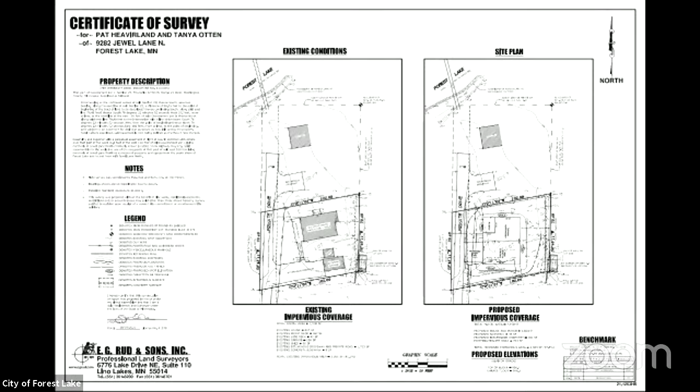In total, this site has 7,950 square feet. That is just about half of the minimum lot size for this area, which is 15,000. Currently there are 3,266 square feet of impervious surface on this site, that's the existing impervious surface. The proposed impervious area would be 2,983.

So there is a breakdown in the staff report, and I'm happy to take a moment to answer any questions on the review.

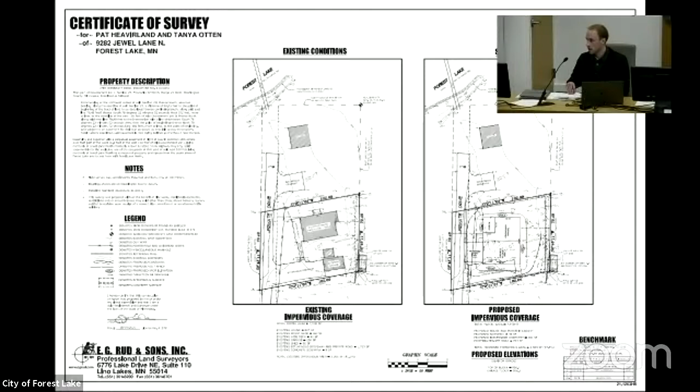Questions for Nathan? Eddie?

So the 12.5%, is that the number that includes this additional drive, or where did that number come from? Let me back up. In the shoreland overlay district, you're normally allowed only 25% of your property to be impervious. But there's a specific provision that allows sites that are smaller. The 12.5 number came from looking at it for 25%, when in reality it should be looked at for 30%.

Geneva? When I was reading on this, it looked like there was something where you were excluding part of the driveway from the percentages because somebody else has to use it to get there. Yeah, that's a good question.

I'm going to zoom in here so you can see. On the screen is showing the proposed conditions. You can see on the westerly lot line running from north to south is a private drive. This private drive serves the property to the north of this subject property with access. So if you were to exclude the portion of the private drive that serves the other property from your consideration, that would remove 332 square feet.

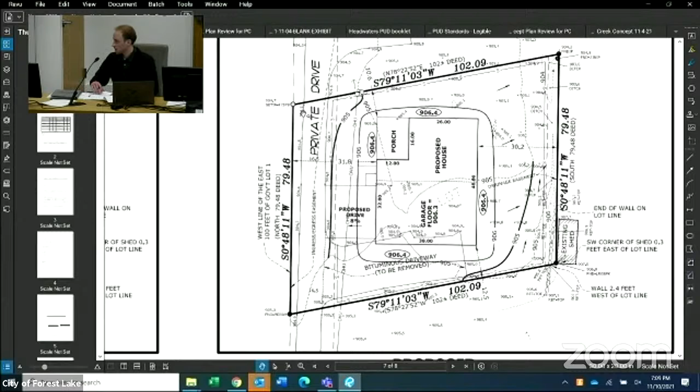Who owns the private drive? In other words, the property that the private drive is on, is that owned by the applicant and they are granting an easement? That is typically, yeah, there's an easement over that area. Since they own that, I would expect that that would be included in the amount of impervious surface. Yep, that's how we look at it. It was just provided to you as a consideration perhaps, or something you might want to know.

But because we're looking at a variance here, I just want to understand what you figured in that 332 square feet. I'm assuming it's the piece of the drive that is beyond the proposed connection into the new garage there, is that correct? Exactly correct, yes, that's just that chunk, an estimate, less than half of the length of that drive. If you're following the cursor here on the screen, you can see this area and up to the top here.

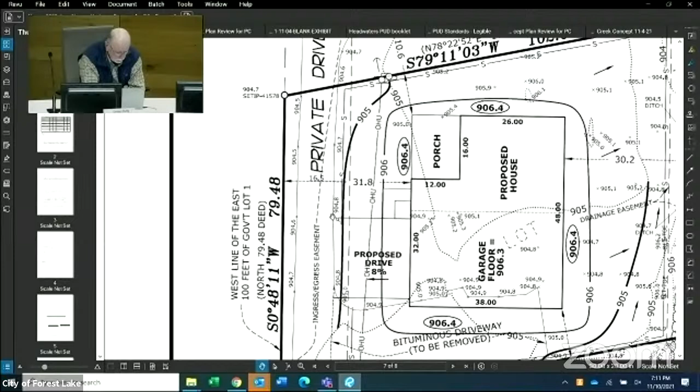So I can move on and briefly discuss the findings here. The applicant has identified the shape and size of the parcel as constituting a practical difficulty to building a new, more modern, single-family home. The applicant is proposing to demolish the existing structures on site and build a use that's in line with the zoning for this area. Running through the findings, on criterion C, this lot predates current zoning restrictions, specifically minimum lot size.

It does not appear that, for criterion D, this proposed plan would adversely impact the surrounding community. And lastly, to address criterion E, the request appears to meet the intent of the zoning ordinance to continue to permit single-family homes in this area.

We reached out to both the city engineer and the public works director, who supplied comments that are in the staff report, and they're also in the proposed conditions of approval, if the planning commission chooses to adopt them. The Minnesota DNR was provided this application for comment but did not respond. The Comfort Lake Forest Lake Watershed District also provided comments, noting that redevelopment of the site would require permitting, and they encourage the reduction of impervious area.

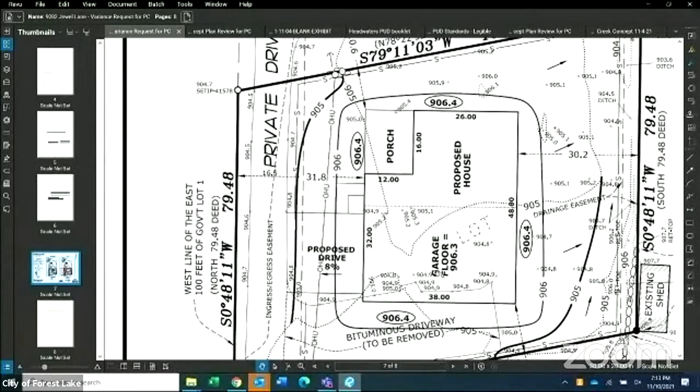I do have building plans, I believe they were supplied to us. I have a paper copy with me too, if you want to see it. You'll have to give me a moment to bring those up — I'm going to unplug here for a second.

As you said, they're going to remove the entire structure that's there now and rebuild completely. Yes, that's correct. They're going to remove all the structures currently on site and construct a new single-family home with an attached garage.

And I'm not seeing the home plans in my files. Does the applicant know — is it one level, is it two levels? I'd advise having the applicant let you know about that; we can wait. Other questions? Well, that was mine.

Thank you. Would the applicant like to come up, say anything, and make any comments you have about your application?

Pat, this is my wife Tanya. I'm sorry, I asked you to come up to the podium here, please — to the podium, sorry, hard to hear you. We're gonna — yeah, so am I. State your name and address for the public record, please. My name is Pat Heavirland, and we live at 3090 Cleveland Avenue, North Roseville, temporarily.

Karen, is the overhead working? The overhead projector? I don't think so. How come, does it come down? I don't have any knowledge of the overhead. No knowledge of that. Oh, here comes the expert — there should be a camera up there that projects it onto the screen. I'm learning something new every day. Kind of limiting here. I didn't know they moved it. I think, Karen, you just pushed number 4 also. Who, me? Really? But I'll have it for the video for the people watching. No, it's this one — it's podium, it's gotta go down there. I don't see anything on the screen. I suppose we could have — is it on? You walk up there and show us.

I could have my wife come up and hold it up for you while I explain. It's showing up live on YouTube, but I don't see it on any other screens. Can you guys see it on your screens? We don't have anything on our screen at all right now. Yeah, I don't know. Well, let's just move forward.

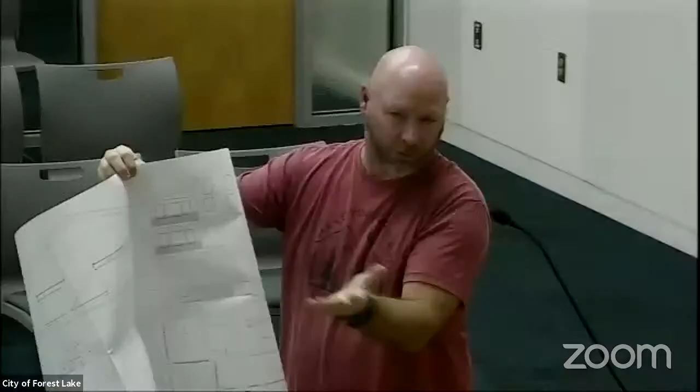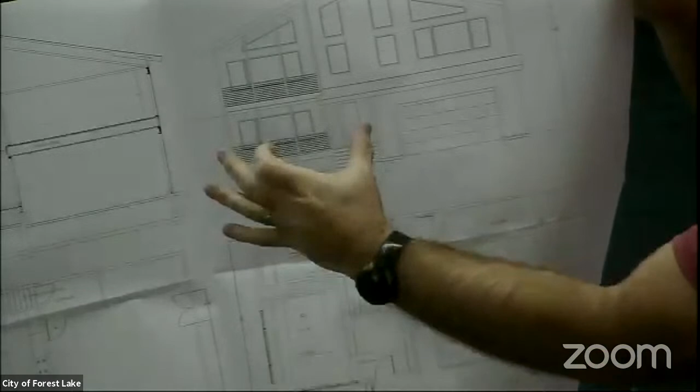So it'll have a tuck-under garage on the south side, and the house is 24 by 26. The garage is 24 by 38, and then we have a 12-foot porch. So the whole building is basically 38 by 48, and it's a 2-story, so that's where you get your 1,824 square feet. The footprint, including the garage, is 1,824. I kept the roof line to a 4-12 pitch to minimize the height for the people to our south.

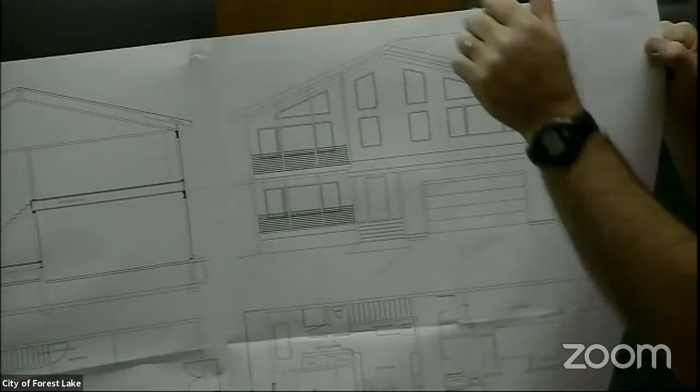I'm trying to be as good a neighbor as I can by building a new house in their view. We've met them, they're really nice people, and we also share the private drive and the dock access with them. But yeah, it's a pretty basic, pretty modest house for around Forest Lake.

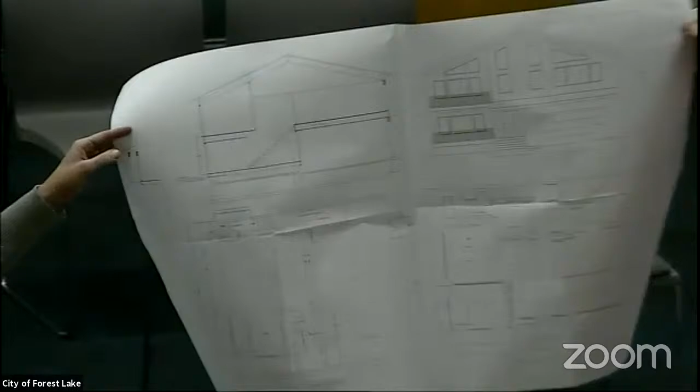Susan: I don't see any patio or deck. Applicant: You're right, I see where you have the porch. That's just the porch. Commissioner: It's constructed as a deck. Applicant: I'm calling it a porch because I'm going to screen it in.

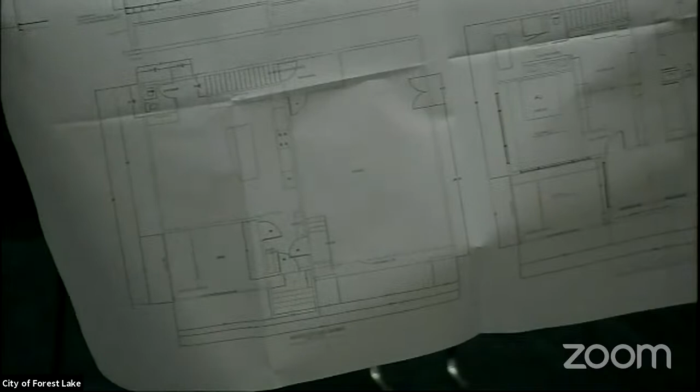So it's crawl space construction? Correct, it'll have a 2-foot crawl space. It looks like you're up a couple feet out of the ground. Yep, right here the house floor will be roughly 2 to 3 feet above the slab as a crawl space, which will be just slightly above grade.

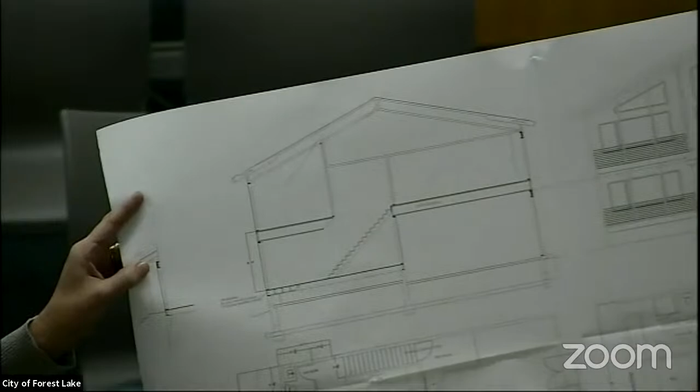You realize that with the variance, if it's granted, you'd already be above the permitted impervious surface, so you couldn't put a concrete pad out for a grill, or an additional deck, no new sidewalks, et cetera. Exactly, I understand, we're trying to fit within the setbacks.

Because the current property isn't within the setbacks at all. And we're tearing out, he didn't mention it, but we're tearing out the current asphalt driveway, which runs right up to the neighbor's property line.

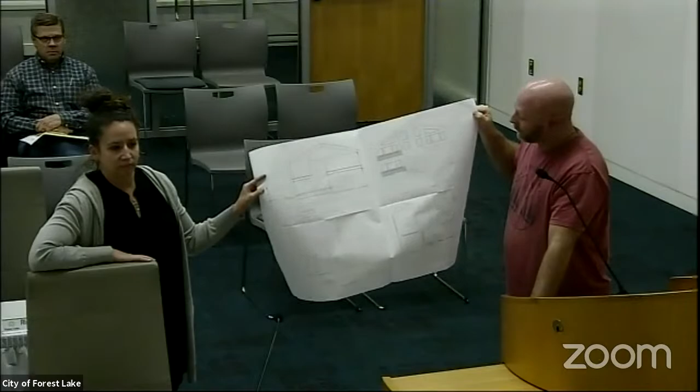There's a retaining wall along that east property line, so that's down and you're up. No, he's down, I'm down, neighbors are up behind him.

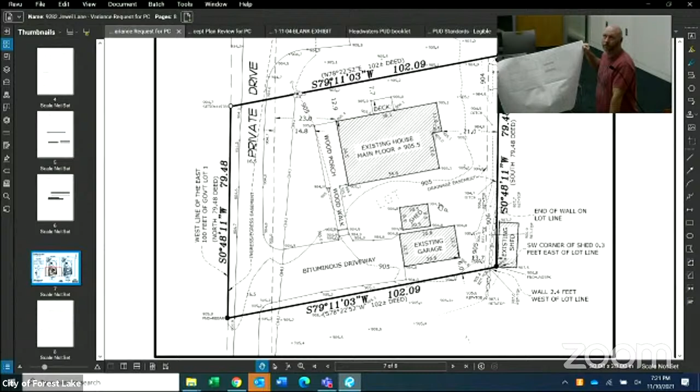Other questions of the applicant? Did you say the garage was 24 wide and 38 deep, or 38 wide and 24 deep? It's 24 wide and 38 deep.

You say there's a cemented crawl space underneath your porch? Not under the porch, under the house. The porch, call it a deck - the only reason I'm calling it a porch is because we're going to put a roof over it and screen it in. So it's going to be wood framed?

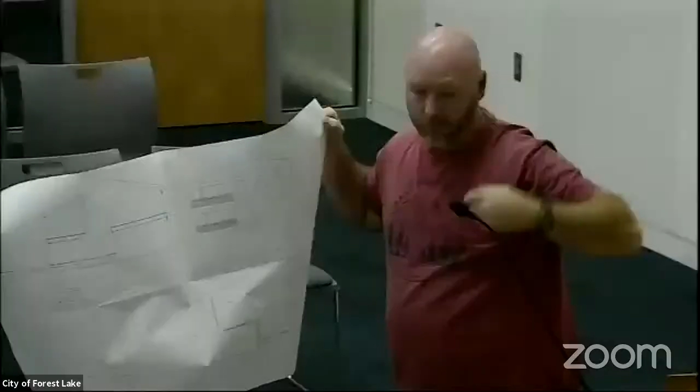Wood framed, probably cedar decking. Not concrete poured? No, no, it'll probably have rock underneath it. I know that counts against us for impervious surface, but it's really not impervious - it's a deck with rock under it. Yeah, but water hitting the roof of the deck doesn't go down into the dirt, so it is impervious by definition.

No, decks are considered pervious. Well, this one's got a roof over it - the roof is what makes it impervious. Right, that's what it says, it's got the roof, so what falls on the roof doesn't go into the ground. Correct. Other questions of the applicant?

We won't make you hold that up anymore. That's fine, if you guys want to see it I can leave it for you. You could leave it for the public record, and Nathan will have a copy of it. It's preliminary, but it's pretty set in stone - I'm the draftsman, so I know it's not changing much.

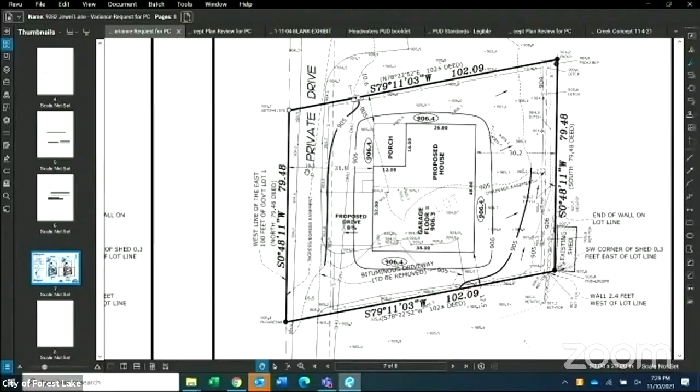Talking about 7.5%. Square footage wise, are we looking at, is that a couple hundred square feet? We're looking at 625. And if the driveway, if we kind of considered that driveway as... well, if you took the 300 off, 300 off, we're looking at about 300, so it's about half over. And I'm willing to grant that extra drive as something that I'm at least not factoring in my own mind into what's happening here. And I realize that if you change the size of that garage, you have to change it.

They are improving the setbacks. I will, yes, I will grant that. We've just had this absolute endless litany of shoreland property variances on setback till we're ad nauseam. Other comments, concerns?

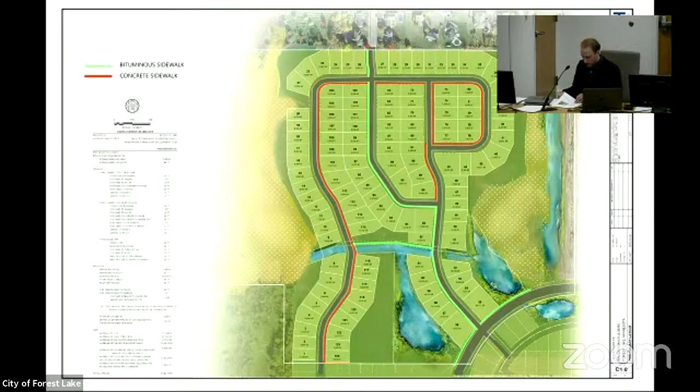The applicant for this concept plan review is John Dobbs, working on behalf of Paul Bruggeman, the owner for this property, you may know, Chris Taylor. This property is located in the Headwaters Master PUD area, to the west of what has currently been developed in the Headwaters area. The future land use designation for this property is low to medium density residential. The base zoning district in this area is MXR1, which we're very familiar with, the residential single family and townhouse district.

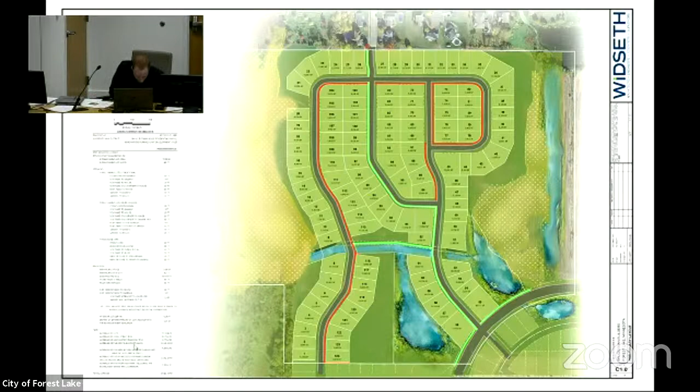As some background for the commission on this application, this parcel is part of the Headwaters Master PUD, which was approved by the city in 2006 initially. This particular property is roughly 60 acres, actually 69 acres roughly. The proposal in front of the Planning Commission on this concept plan has 125 single-family lots proposed for the property. The land use proposed for this development is exclusively single-family homes, which does appear to be consistent with the vision established by the Headwaters Master PUD for this area.

So I'm going to really quickly jump over to the Headwaters PUD so we're all on the same page. This is the cover page for a really big packet of information, but I'm going to go to the master plan here. You want an original? I found one this weekend. You have one, okay. That's hard to find. So this is the master plan for this area.

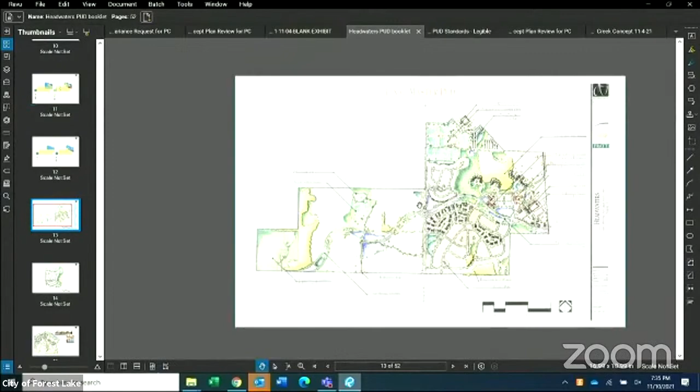If you're looking at the screen and the cursor, you can see the location roughly of this parcel. This area from the very get-go was guided for single-family land use. This is part of phase 2 for this PUD area. As the Headwaters Master PUD was established before 2008, conditions changed almost immediately after this was approved initially, so the phases established, part of phase 1 and phases 2 and 3, were put off by the developer at the time. That's a little bit of the history. So I'm going to go back to the plan here.

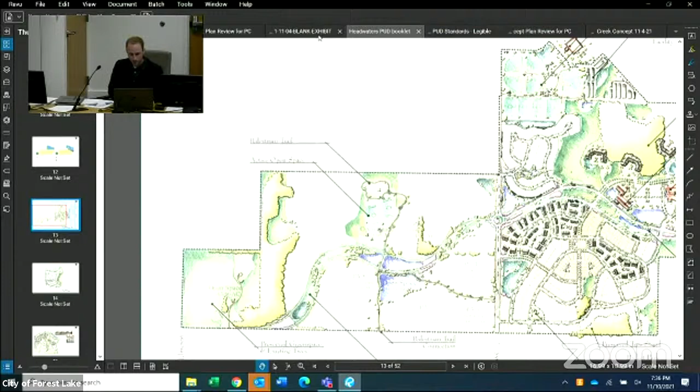So the Headwaters Master PUD established standards for single-family homes for this area. The standards are in the staff report that you've had the chance to review.

The minimum lot area for a traditional single-family lot is 7,000 square feet, with a minimum lot width of 65 feet and a front yard setback of 25 feet, a side yard setback on a corner property of 20 feet, a rear yard setback of 25 feet, and setbacks for the side yard that differ depending on which side of the house you're on. If you're on the house side, the setback is 10 feet, and if you're on the garage side, it's 5 feet. Those average out to about 7.5 feet typically.

The proposal by the developer roughly mirrors the standards established for this area. The developer, in this plan submitted to staff after we published the report, shows a minimum lot size of 7,000 square feet, consistent with the PUD, and a minimum lot width of 65 feet, also consistent. Front yard setback of 25 feet, side yard setback on corner lots of 20 feet, a rear yard setback of 30 feet, which actually mirrors the MXR1 district standard, and then the same side yard setbacks established in the Headwaters PUD. So it meets all of those standards for a traditional single-family lot.

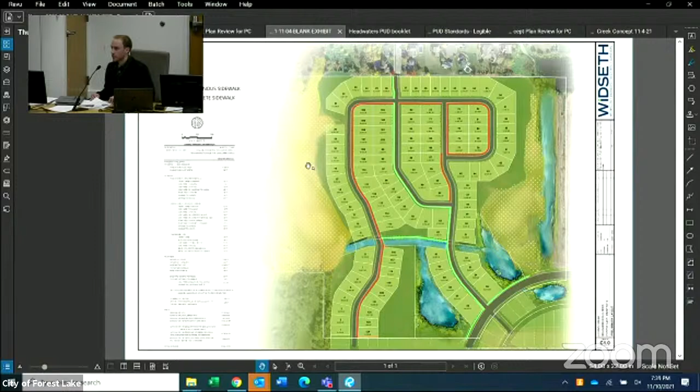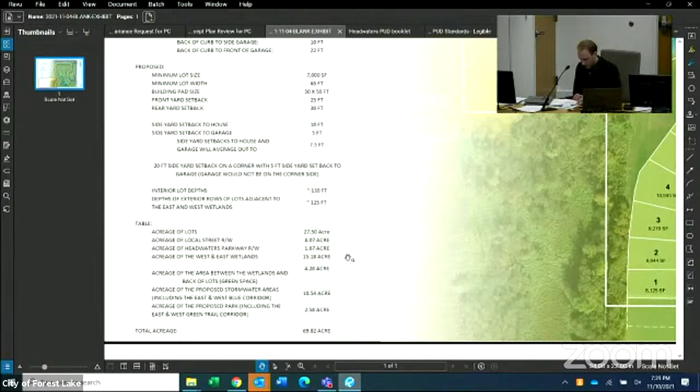The density proposed for this development on gross acreage is 2.08 units per acre. If you subtract, in the plan the developer provided, the calculation for the amount of wetland acreage, which is estimated at 15.18 acres, from the overall area, you get a density of 2.27 units per acre.

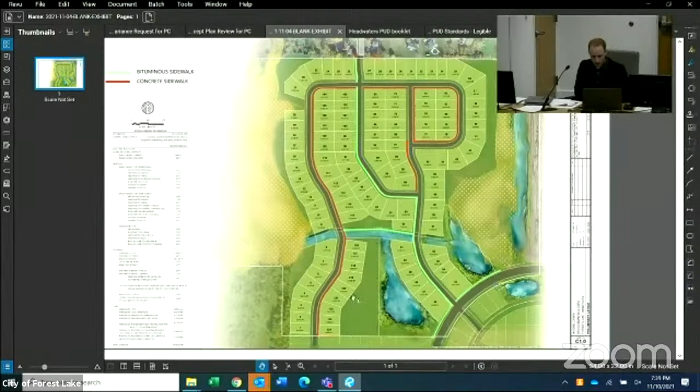So, parkland dedication. Here you can see in this development a green area—I'm circling it with the cursor right now. That is approximately 3 acres in size and situated near a 4-acre stormwater area, which is to the east on this concept plan.

The developer is proposing trails. You can see on the screen a concrete sidewalk proposed here in red, which would run along at least one side of every street, and a bituminous sidewalk shown in green here. This system of sidewalks would provide connectivity from Headwaters Parkway up to the trail system north of this development.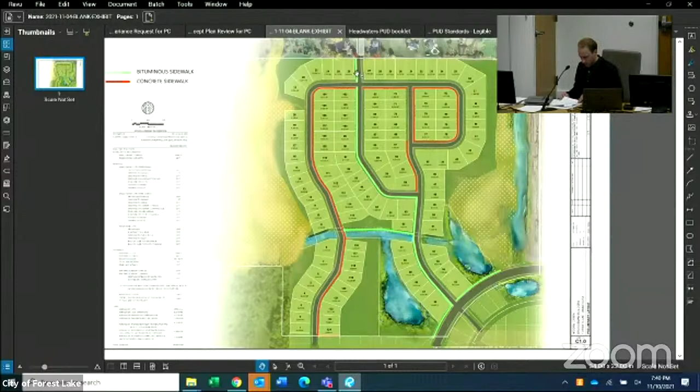In summary, this does appear to be in line with the intent of the comprehensive plan for this area. The city engineer was approached for comment and provided a memo attached to your report. Staging of this development, I'll defer to the developer—John Dobbs is here this evening, and I'm sure would like to present his proposal to you. Staff recommend that you consider this concept plan and its conformity with the city's requirements and provide feedback to the developer. So with that, I'll hand it back to the chair and take any questions.

Any questions of Nathan? Mike?

Nathan, could you run the setbacks by again, the side setbacks? Yes, absolutely. The side yard setbacks for this Headwaters Master PUD are 10 feet from the side yard to the portion of a building that's the house, and 5 feet from the portion that's considered garage. Since we can't see it here, is it house on one side, garage on the other, then the next house would be garage and house, garage? I believe that's the idea—because that's only 15 feet then from house to house, or structure to structure, correct? Yeah, at a minimum it would have to be at least 15. Okay, all right, thanks.

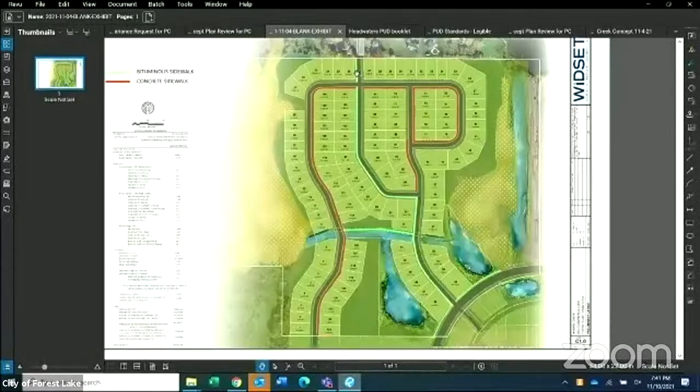Well, to clarify that, as long as we're on this point—right on this page you have up, it shows garage to garage being 10 feet. Down in the setbacks? Can you scroll up, please? Looking at it—it says right here, go up a couple more lines—garage to garage, 10 feet. So we know that the fire department is not going to allow anything less than 15 feet between structures. So the garage to garage minimum needs to be 15, not 10.

I know that Chief Newman, that's his floor, would prefer to see 10 feet or 20 feet total. But I want to make sure, I don't know if the developer's here or if you're the developer for the next site, that there's got to be 15 feet between structures.

Other questions of Nathan? They didn't provide any information on building pad sizes. Is there any indication of what they're looking for here? Yeah, so building pad sizes are proposed on this plan to be 50 feet by 50 feet, so that's 2,500 square feet. If you took 5 feet off of that, that would be...

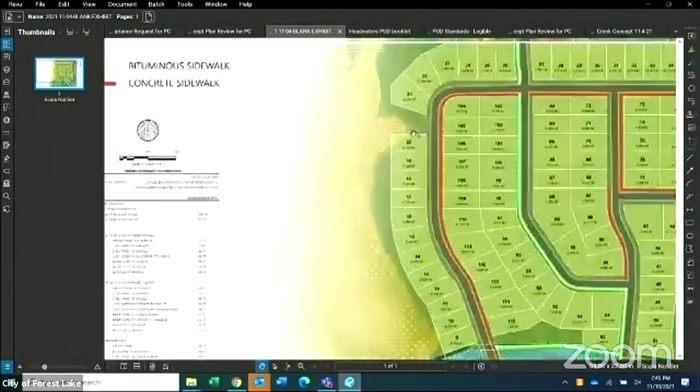Hearing none, is the developer—oh, Susan, I'm sorry. Nathan, have they told you what is happening between lots 20 and 21? I believe that's part of a wetland area, you can see it on the screen here zoomed in. I would defer to the developer on the decision for that area.

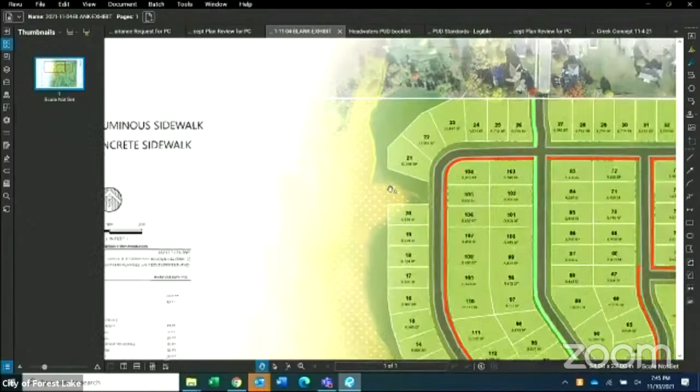My last question for you, Nathan: if you go down to where the park starts, where the river walk is, I see that little sidewalk that goes in—talking about this thing here? Is that proposed to be part of the parkland, or is that an easement over a property? I think this area here is proposed to be part of the park area. Anything that's the lighter green color would be part of one of the lots. I couldn't get it clear enough on my computer at home to tell.

All righty, thank you. So it would be part of... they would walk on the park. It's the next one that's an easement. But in practical reality, we know that's just not going to happen. Lot 116 is gonna go all the way up to, I guess it's like a rolling river that they've got there in blue.

Well, I'm thinking more like... as far as I understand, just to clarify what this blue color is—and I'd have the developer give you more information—this would be a swale to allow for water to drain into the wetland complex to the west. So it's not a river walk.

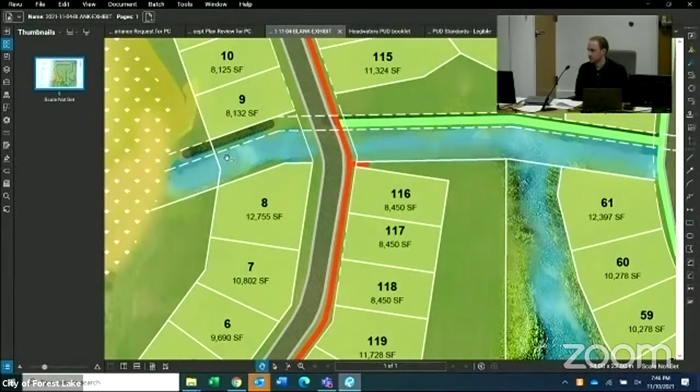When it's raining, it might be—well, heavy rain. And basically what humans do is lot 116 is gonna go and mow and assume that their property goes up to the edge of the swale. I'm not sure, in terms of somebody taking... I have questions when the developer comes. I would be stunned if you didn't.

Other questions of Nathan? And the developer is present. We ask you come up and please state your name and address for the record. Maybe spend a couple minutes giving an overall concept, how you think this is going to fly, and then I assume we will have plenty of comments and conversation with you.

Good evening, my name is John Dobbs, and I'm project manager for the Hidden Creek Project. I work for Paul Bergman in the back. Yeah, I'd be happy to do that, commissioners, and I'll try to answer—I think I got most of the questions here. So we have been working on this project for about a year and a half now, and it's an interesting piece of land. It kind of ends where the last phase of the PUD—I actually have a copy of it as well in my office—and it kind of harkens back to my landscape architecture days at the University of Minnesota.

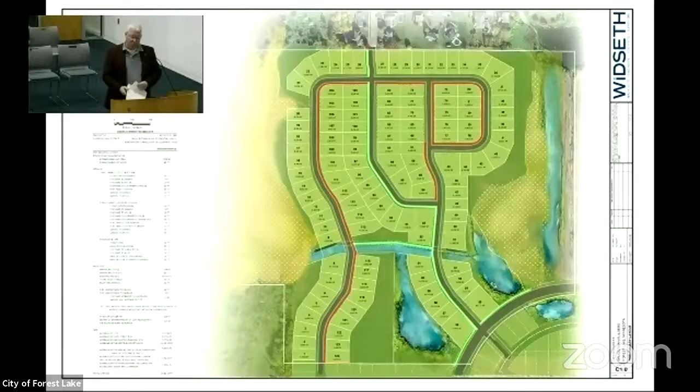It does impinge on lot 20 - that wetland delineation with the speckled area impinges on lot 20 a little bit. So we're working through the final details in the preliminary plat of a grading plan, and the horizontal and vertical road profiles. We have to connect to the north, and we have to get back down to the low spot, which is actually the blue area between the east and west wetlands. We haven't worked all the grading plan out yet.

So obviously when we do that, we'll have to come up with the minimum square footage and the setbacks and all the other things that go with it. Did I answer your question about lots 20 and 21? It will affect the buildability of lot 20, depending on where the line is. Yeah, that's correct. So we're going to work through that.

Come with a variance on that, maybe. I have a sense that you have a good memory for things like this. I do too. So we'll cross that bridge when I actually get a preliminary plat.

It is all single family. There are no townhouses, and they have traditional garages on the front.

The trail - you guys were just discussing the east-west connection, the trail on the north side. It is a concept. From my point of view, there's a number of things to work out. It looks very geometric, and water and parkland very rarely look geometric. So I began to do some rough sketches. I was actually in front of the Park Commission about 4 months ago, maybe a little longer. We had a pretty good dialogue about what the Parks Commission was looking for. They talked about some of the problems they were experiencing historically in the park.

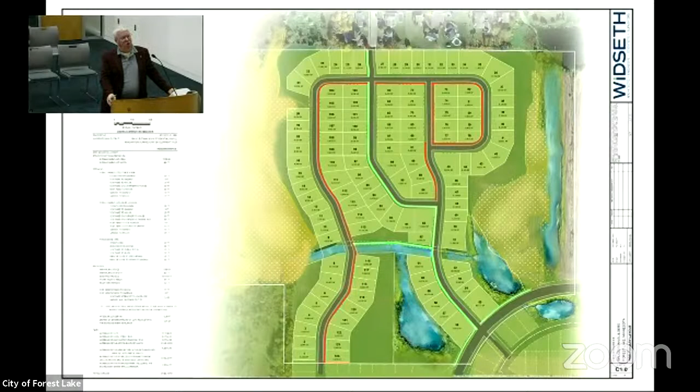So there's a bounce factor where the water could top over, and that's why there aren't any lots there. It'd be a low spot in the street, allowing the water to overflow to the west side, and that wetland on the west is huge - that's actually where the drainage pattern really goes. So it's not park, it would be open space. Yeah, it's part of the stormwater bounce system. But that being said, it's open space, so it would be good to have it at least somewhat programmed, so it could be used on some level, whether it technically would be park or not - probably not, it would be stormwater.

Susan? Okay, I'm looking at the green - are you intending that the horizontal green is the entrance to the park, for all those folks to the north?

And if so, then you're going to need some sort of a bridge, because otherwise you've got a swale there—you go down the swale, up the swale—and there's no real way of getting into that park area with a stroller, a bike, or a big wheel. I don't see how anybody's entering that.

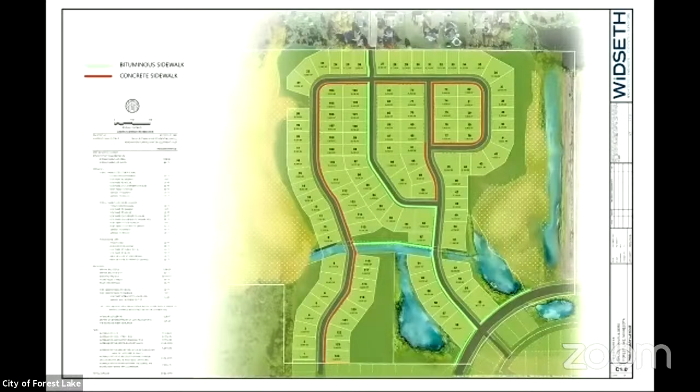I also don't see how that little sliver backing on 116, 93, 92, and 62 would get accessed, assuming the city has to maintain it, cut the grass, etc. Then where you're backing up to 116, 118 through 125, from a public works standpoint, that's a bear to maintain.

And again, I'll also say that 117 is not going to believe they don't own all the way up to the edge of the ditch, unless somebody's fencing it. We're dealing with humans.

What is the thought on the east side, 36 through 48? Is that to be maintained land, or will the backyards of those properties fade into the wetland? On the east side—36, 37, 38, 39, the northeast corner, 43 to 48—there's a curve that comes through.

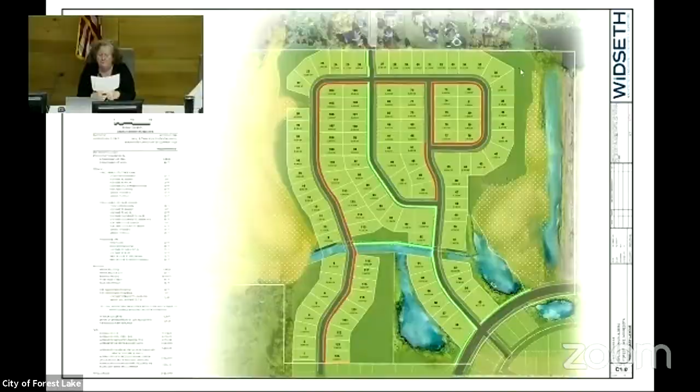Well, there's a wetland buffer that Rice Creek Watershed has, and then it would just be open space adjacent to the wetland, shown as the dotted graphic, which is the delineated wetland.

My concern is that folks are going to say, 'Well, I live in 37 and I really want my big garden,' and put the play structure in that area because it looks like it's theirs, but it's really supposed to be wetland buffer.

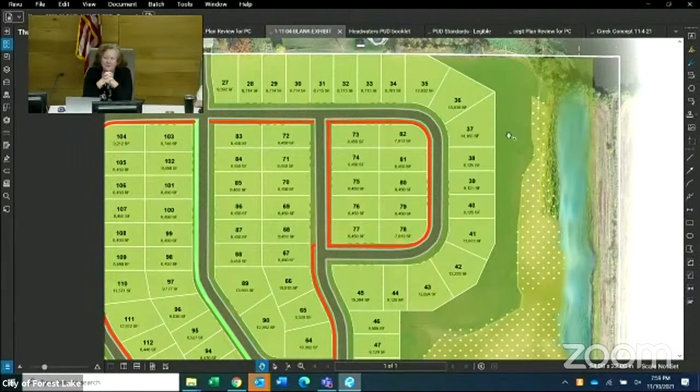Yes, this is a challenge, and y'all have done great—it's a challenging property—but I see future challenges in terms of what's public, what's not, what's buildable, what's not. Y'all are going to leave, and then the city's going to have to figure out how to deal with encroachments, maintaining the wetlands so they function as wetlands. I'm not sure how we get in there, to be honest.

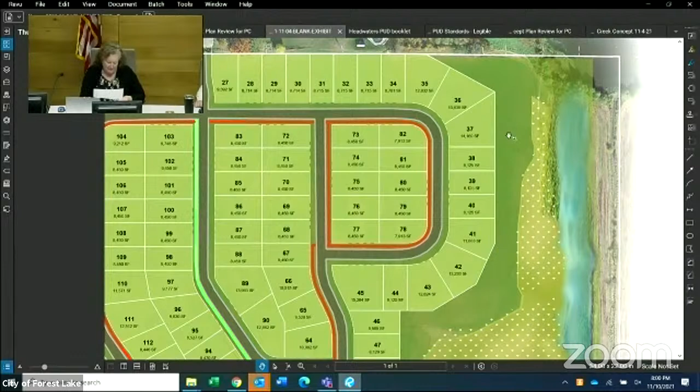In terms of delineation, I just went through this on a small project in Blaine. There's a perpetual easement given to Rice Creek Watershed, and you have to sign it. There are little signs every 100 feet or at every angle of a property line on a post that marks it perpetually. Rice Creek Watershed has people responsible for making sure people don't put swing sets and things there—I've talked to Patrick and Terrence over at Rice Creek Watershed about this, and they've had real issues with that.

There's also a process we'll go through about where the wetland is, where the setback is, and how to maneuver that line from their point of view and ours to make the project work. So the final line is subject to their final review, but the signs are how they actually delineate it. It says something like 'wetland permanent easement, no spraying, no grass cutting.'

And you put those signs up as part of the development? Yeah, and Rice Creek Watershed comes out and reviews that they're in the correct spot before they'll consider the permit complete.

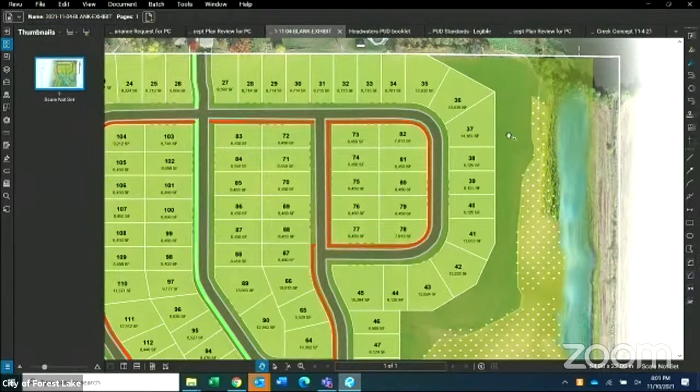Sorry Chair, I have a question—has the location of that anticipated buffer been delineated yet? No, it has not. The process used to be 50 feet, period, but Rice Creek Watershed has amended that—I don't want to say I know it perfectly, but having lived through it in Blaine a little bit.

The final version is that Rice Creek Watershed sees some setback areas as more critical than others. Where it's really flat, they're less concerned about water rushing in; where there's a slope, it can meander. So it's not going to be 50 feet everywhere—some places will be 15, some might be 0, some might be 100.

I guess what I was wondering is, do you know how that will impact the property lines on those lots? Well, that's why we've done the concept the way we have, to pull it back enough that we have room to adjust, depending on the final delineation, which is also subject to Rice Creek Watershed's final ruling, and also goes to grading.

From the east and west side up to the top, the highest point is, I'll take a guess, 30 feet. So there's actually a fair amount of fall, and we have to balance the dirt and make the streets work. Then there's all the civil engineering involved, making sure the snow gets plowed and all that. So it's a balancing act, and we've left enough room to be able to maneuver.

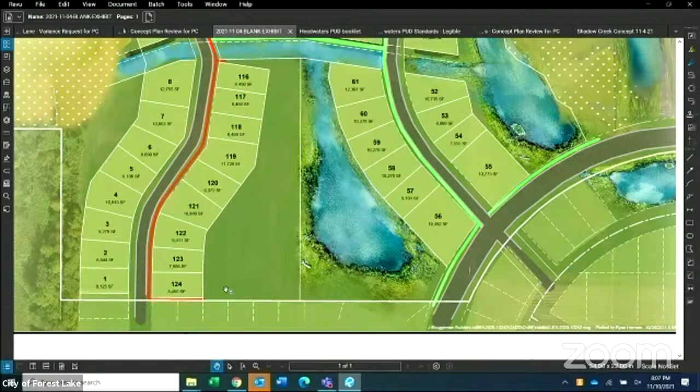Right, there would be — it's graphically just shown as pedestrian sidewalk connection points, but what I can say again, ma'am, is that my intent, once we flush out some of the civil stuff in terms of grading and other things, is to really drill down on how the parkland itself, which is kind of an odd trapezoidal shape, works, as well as the pond to the right, also a trapezoidal shape with a blue graphic in the middle of it.

How do those actually work? How does the space work? How do the connection points work?

And I will do a better job of presenting that to you, but I totally understand what you're saying. Graphically, it doesn't look like things connect. I'm here to tell you it will connect when we come back with the preliminary plat.

Because again, you've got that wetland that is not park space. Right, absolutely, it is not usable as park space. It can't be mowed. So I'm just trying to see how usable that will be and how accessible that will be in the center, to the whole community.

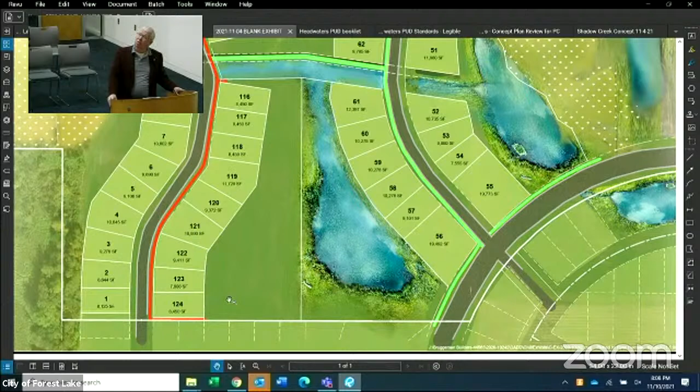To this community, I'm living up there in lots 27, 28, 29, 30. And how am I getting into this park area unless I go all the way around to the west, come down the street, and come all the way down to the end?

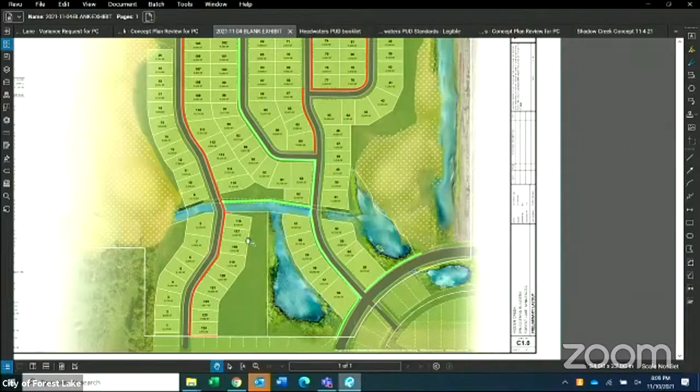You get right here. Well, there's the green trail, but no, because you've got to go down the slope across. He says he's gonna put something in there that's gonna allow him to walk into the park. Yeah, your point is well taken, Susan. There really is, right now, the whole eastern half of this thing doesn't show any access for them into the park except by looping around this whole thing.

Unless you move it to the south side. Yeah, right, or do a pedestrian bridge across. And yes, I hear your point clearly. It will be something that as you move your plans forward, it would be appreciated too.

I will do a detail on how the folks in the entire development are going to use this area. Absolutely, the heart needs the arteries. I'm sorry? The heart needs the arteries. We don't want to have clogged arteries, and we won't.

Sometimes I unfortunately don't have time to do anything but let my civil engineers design, and you get what you get. So, nothing personal. I'm sorry, council. Mike, did you have a question?

No, it was pretty much, I was gonna say, if you move that sidewalk from the north side to the south side, now people have complete access to the park from either direction. Yep, but Sharon hit on that already.

Other comments for the developer? Next time we'll see him at preliminary, so if you're missing something here.

I will tell you, I'm happy with the houses, that you have some front of the houses, and I just don't see a garage. I was really hoping not to see a little 8-foot narrow doorway and a 3-car garage, so you do have, kind of looks like a room to the left or right of the door, so it gives us some streetscape. I'm happy to see that.

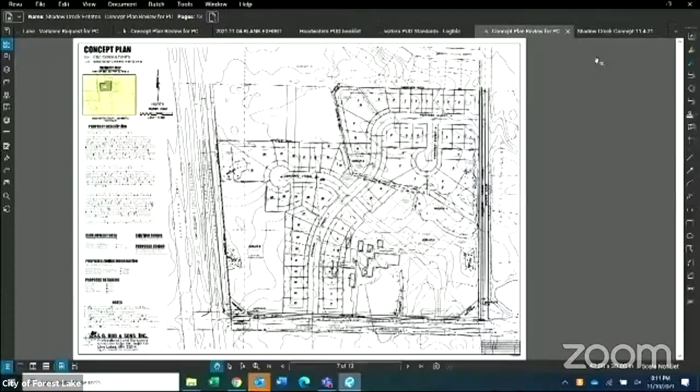So a comment for you right away. All right, I'm going to go right to the concept plan here, cut to the chase. So this concept plan for Shadow Creek, the developer has submitted, since the staff report was published, a new concept plan that we have not had time to review, but I will show it to you.

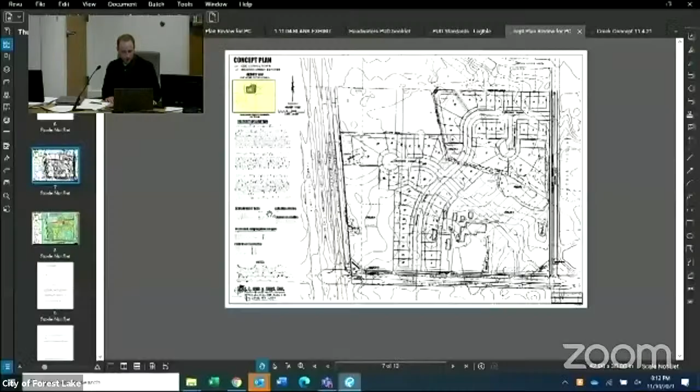This concept plan on the screen is what you've seen in the packet, and you'll know from the packet that there's a variety of land uses proposed here. Our developer is actually not here this evening, so Chair, I would defer to how you would like to handle this. It may make sense to table this item until the December meeting to give staff time to review the new concept and to ensure the developer is here to receive your feedback.

I just want to give you a brief overview of where we're at right now. This concept on the screen is what we have received since the publication of the packet, so again, we haven't had time to review for things like access and other potential land use considerations presented by this development. I'm happy to give you a little bit more information now, or Chair, if you prefer that this item be tabled until the next meeting, that might be best.

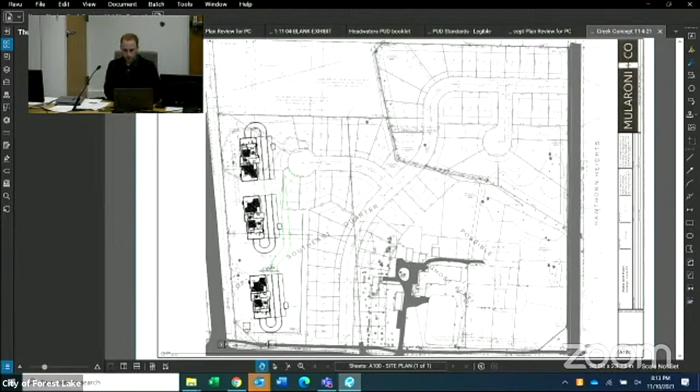I think we could take a little information primarily for you, to know just initially if there's anything that really jumps out at us, to make sure you cover it before the developer spends a lot of time and effort refining a plan that isn't going to fly.

And the developer has the letter from Washington County. The developer does have the letter. That says not only no, but heck no. Yes, we have a meeting scheduled with Washington County, the developer, and city engineering staff to sort through that comment and work through the access considerations for this site, because there are some definite access considerations.

On that note, this site is located at the northeast corner of Akine Road and a state highway. So access is an important issue for the site, not only the proposed single-family lots, of which there are 58, but also Outlot B here, which is proposed to contain a high-density residential land use. So a lot going on here with access and land uses, but I'll kind of continue this overview for you.

So the applicant is Todd Christensen. He's a developer looking to purchase 2 parcels that constitute this entire site. On this, he wants to have a kind of a range of land uses.

From left to right, or west to east, you're looking at high-density residential in Outlot B, which would run along Highway 61. Then you have some single-family homes proposed here in sort of the center of this site, running to the northeast corner. And then in the southeast corner of this site, you have a little bit more of a rural residential style land use, with the applicant proposing to actually live on this outlot C, and have horses and kind of a hobby farm. So that's what's been presented to staff as the proposal here for land uses on this site.

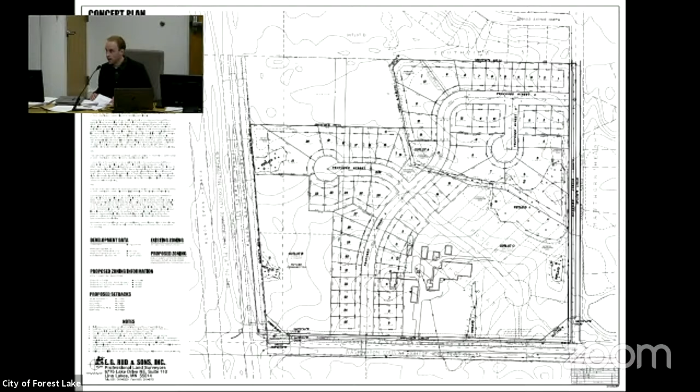There are requirements for keeping livestock in the city, and for horses, you have to have at least 2 acres of grazable land per horse. So that's something to be aware of for Outlot C. There's calculations for a bunch of different animals, so if you have questions on what kind of animals and amount of land - we've been down that road.

I'm sure you have. Okay, consistency with the comprehensive plan - this proposal is frankly not very in line with the future land uses for this area. So in terms of steps for the developer, they're going to have to go through some amendments, both to the comprehensive plan, and they will probably have to do some rezoning as well for this site. What are - request amendments and request rezoning. Thank you for the distinction. They will have to request them, yes, and they will.

I'm not a fan of spot zoning, so it should be similar or the same as the adjacent areas. And so I don't want to see ag come in here for this outlot. That makes sense. You know, usually when I'm in favor of a potential comprehensive plan change, it's similar to the adjoining areas and not a spot zone. Not been looked favorably, to spot zone.

You're gonna love this plan.

So as long as you're educating us, where exactly is Outlot B? Is it on the back of all these houses he wants to keep? Outlot B, if you're looking at the screen and the cursor, is right here. That's for the apartments—this is high-density residential that will be proposed for that.

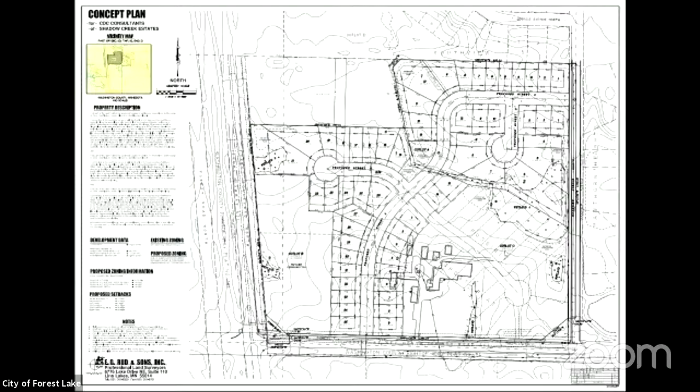Outlot C is that whole dotted area. That's how I read it—well, that's how I'm thinking. Or maybe it's Outlot O? I mean, this is a proposal, this is a concept plan.

So this isn't divided, this is just two parcels right now? Currently, yeah, this site is two parcels with different zoning designations. What are those zoning designations? Actually, sorry, there's one zoning district for these two parcels, and that would be multiple family. There are two future land use designations.

Sorry for the confusion—the east parcel here is your high-density residential. The west parcel is guided for mixed-use development, which is in line with its location on that corridor on 61. So how is it zoned right now then? Mixed use, multiple family.

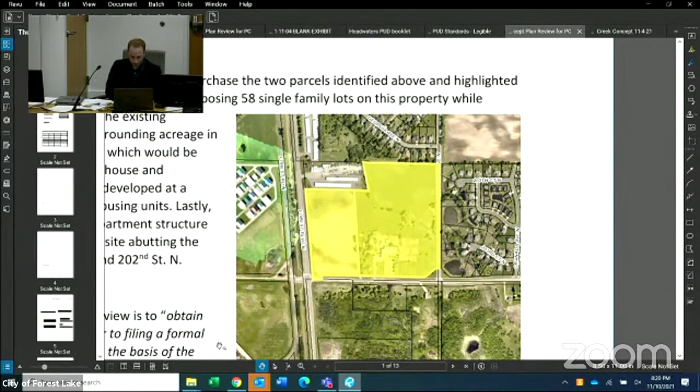No, I thought the east part is multifamily and the west part, if I remember right, is mixed use because we were looking for some retail or commercial on that corner, since the corner to the south was planned for a stop-and-rob, like a Kwik Trip gas station. Okay, so you were looking at the current zoning map for the city.

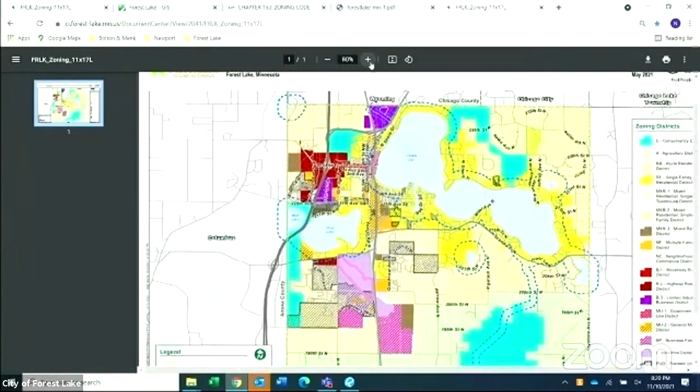This orange color is multiple family, and I'm going to zoom in on the parcel here. So if you're looking at the cursor, this is the current zoning designation for these two parcels.

So they are guided the same? Their zoning district is the same, but they're guided differently. Okay, I had it backwards—they're zoned the same, but guided different. All right.

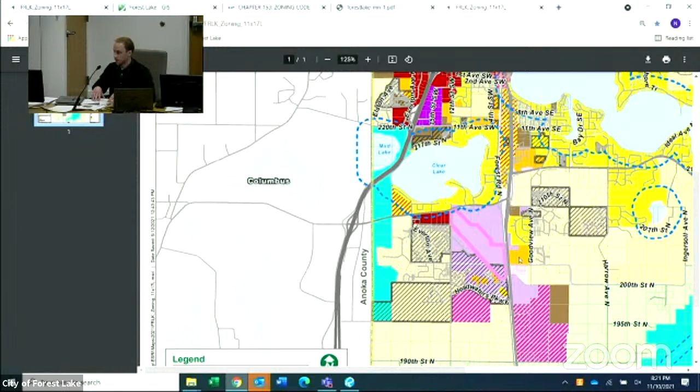Any other questions? So do we have any idea what he was thinking here with this Outlot C—is it about phasing of the development or anything? We haven't received any information on phasing to date. We'll be looking for more information like that, in addition to learning more about the proposed land use for this sort of rural residential area. I think the intent is to keep the farmhouse complex area as his and his wife's home for a period of time, and then that would be sold and developed as additional single-family lots.

Hold up—so that's what was represented? The equestrian entity is temporary, or an interim use? That's how it was relayed to me. Okay, an interim use.

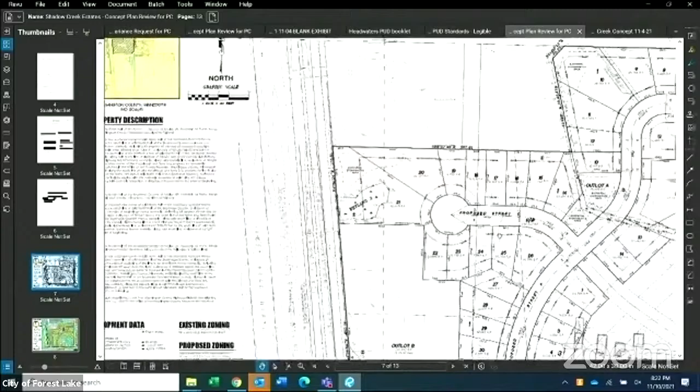I can talk about parkland dedication—that's kind of a unique one for this specific development. Parkland dedication for this has been recommended to planning staff by park staff to be accepted as cash in lieu. The reason being, you have a park directly abutting this development to the north that could use some additional improvements, so funding from parkland dedication here could fund improvements to that park.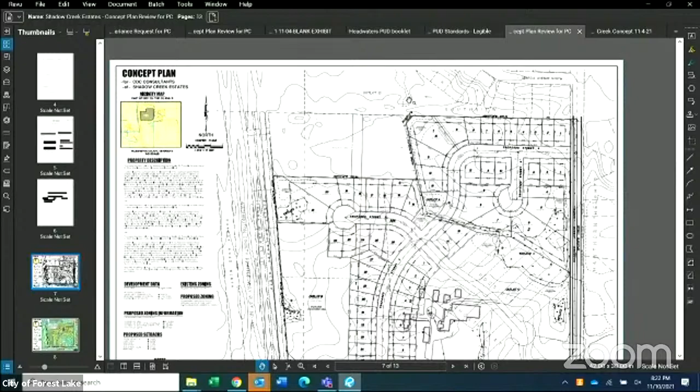And in the narrative, it says there will be an easement into the park. I would expect there'd be a proposed easement to accommodate a trail connecting this residential development with that Southview Park. To my commissioner's point earlier on the concept—owning it is much better than easing it.

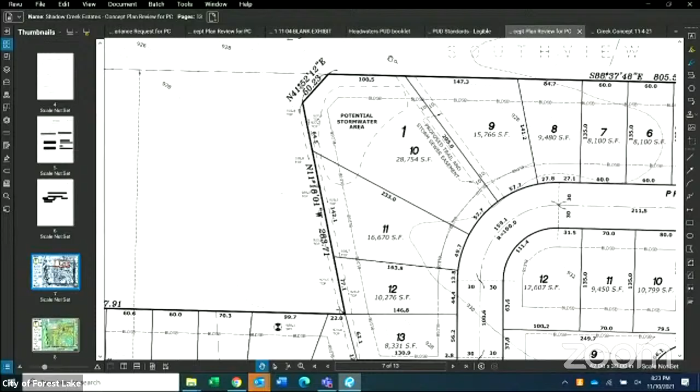Ideally, I'd like to see a whole lot dedicated. That park to the north is pretty big—it'd be nice, even if weirdly shaped, but it's pretty big. I remember when that project came through, but it'd be nice to have, similar to what we discussed in the previous concept, enough area that we know it's paved and it's actual parkland, so people don't feel they're trespassing.

Right. And you were there when we had—during an election, or during election time, we tried to hit all of the parks.

That was a challenge, because everybody kept saying they didn't know where it is. There's a parking lot on the north side of Southview Park, correct? Yeah, this is where kids used to go back and drink, and some still do. I was reading comments on the park about how to get there - I wasn't sure I could drive there. They have a dirt driveway, yeah you can.

I think there's access to Southview Park if you're looking at the screen, up off of Georgia Avenue. Yeah, there is. I don't know what it looks like now, if it's been mowed by the neighbors. It's a dirt driveway, two tracks.

I'm afraid that the folks living up there on Georgia who are hoping to have a horse farm forever are going to be very disappointed.

What is the plan or thought for that cutout that's really pretty much a wetland? They've been trying to crop it for years, but it's really a wetland and there's tile under it.

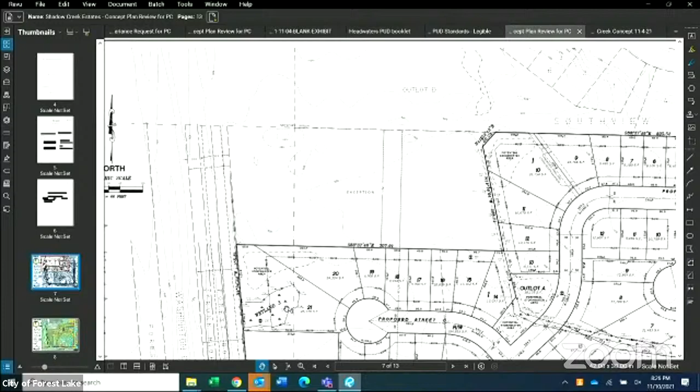I can't speak to this specific parcel that is the exception on this concept plan, but regarding wetlands being challenging in this part of the site, I've talked with Ryan Goodman, city engineer, about the challenge for lot 21.

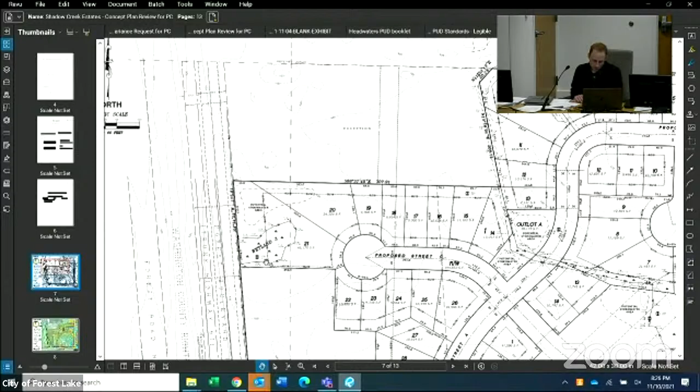So the reason for that kind of unusual layout at the north end of that Outlot B must be because he was planning on access from the cul-de-sac into that larger area. Yeah, how else would you do that?

There will be comments - I think the city engineer has provided some comments in this report - to the effect of not providing access through a cul-de-sac, and instead needing to provide access through perhaps removing some of the lots towards the south of the site. So the access to Outlot B, and access for the site in total, are still considerations we're working through.

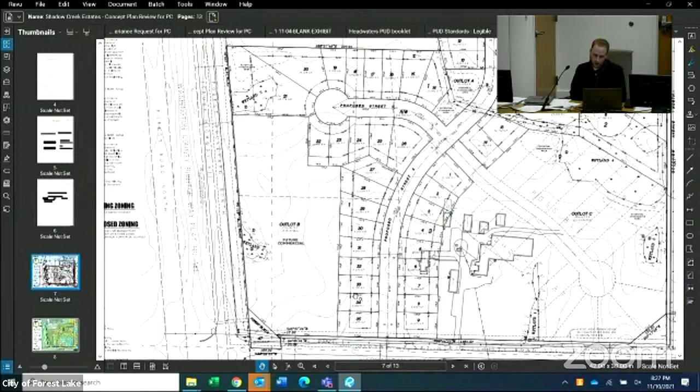I guess I would really recommend if he's going to do this, he could come in off of Goodview and not even try to do the accesses off 202nd.

That intersection gets really ugly, especially around school in and out time. I know Washington County is planning on putting bike trail access along 202nd, and they're going to be doing a big redo of County Road 50 as part of their capital planning.

That cul-de-sac's gonna be way too long, man. Maybe not, I don't know.

So we would expect to have the developer here next time, and you'll probably have an answer from Washington County on some of those things.

Yes, we do have a meeting scheduled with Washington County - we're hoping to get some of our questions answered at that point. We'll also have had more time to work with the developer on other comments we have on the concept plan that was very recently submitted.

In addition, we can grab information on staging of the development if the developer has that available. Just to recap on next steps for this project after this concept plan review meeting: looking at requests for comp plan amendment, requests for rezoning as they're identified, and then going through standard preliminary plat and PUD, and final plat and PUD.